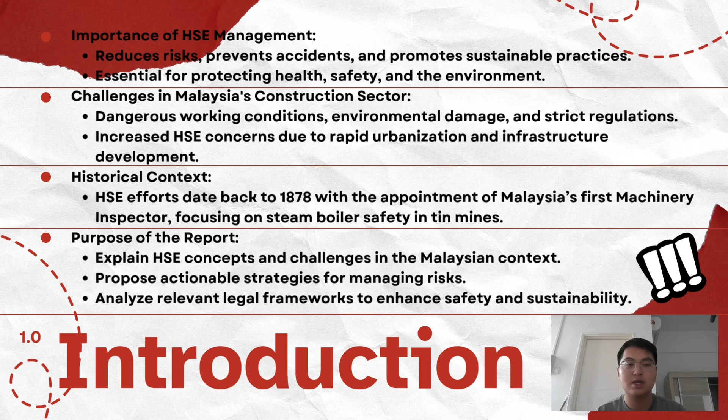This report aims to first explain HSE concepts and challenges within the Malaysian context. Second, propose actionable strategies to manage risk efficiently. Third, analyze relevant legal frameworks to improve safety and sustainability in the sector. Together, let's work toward a safer and more sustainable future for Malaysia's construction industry.

Thank you. Bismillahirrahmanirrahim. Now I'm going to talk about current HSE issues in Malaysia. There are some major issues, the first being high accident and fatality rates.

Number 2, poor construction quality and environmental impacts. Number 3, regulatory challenges and new problems arising during construction.

Now I'm going to talk about the causes. There are several causes, and number 1 is inefficient or insufficient workforce. This may lead to the limited enforcement of worker welfare, like rest facilities and sanitation, which may lead to the spread of infectious diseases like hepatitis A among the workers.

Number 2 is inadequate tools and technology, such as lack of proper equipment for tasks like working at high-rise buildings. There was a case of a fatal fall on 15th March 2024 due to poor safety equipment.

Number 3, economic constraints. Insufficient funding leads to low quality machinery. There was a case of a worker being crushed in a molding machine on 2nd March 2024.

The last cause is unsafe worker behavior that doesn't follow safety regulations, resulting in accidents. On 16th January 2024, a worker was electrocuted because of improper wiring. All these cases have been investigated under Section 15(1) of the Occupational Safety and Health Act 1994, Act 514.

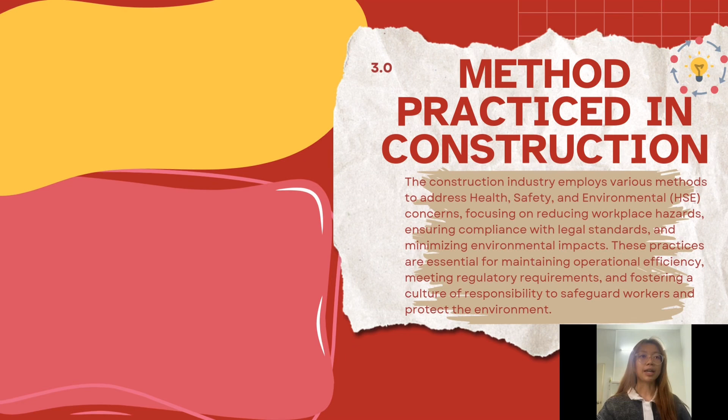Focus on safety and health management. Key methods include regular site inspection, risk assessment, and safety planning to identify and address potential hazards. Personal protective equipment is critical for worker protection. Well-designed training programs equip employees with the skills to operate safely. Emergency preparedness further ensures readiness to respond effectively to unexpected incidents.

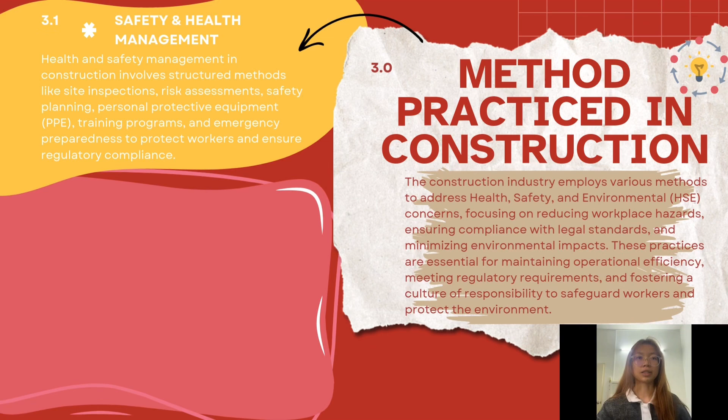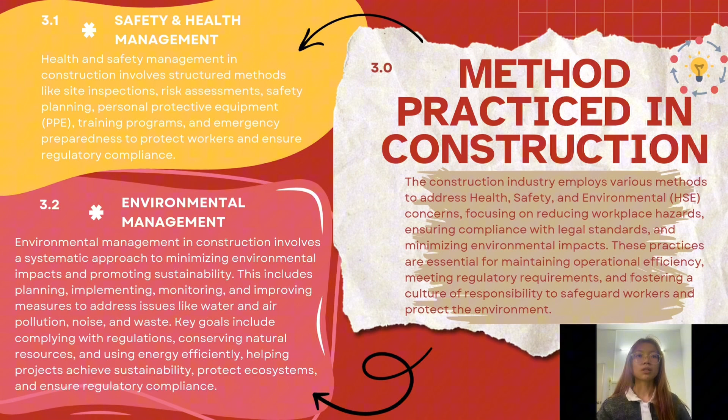On the environmental side, management efforts aim at minimizing negative impact and promoting sustainability. This involves careful planning, continuous monitoring, and implementing measures to address issues like air and water pollution, and waste. By conserving resources and improving energy efficiency, the industry not only meets regulatory requirements but also protects ecosystems and ensures sustainability. Now, let's move to the next page.

Now I'll be sharing some key methods used in safety and health management in the construction industry. First, let's talk about site inspection. These are proactive measures where the construction site is thoroughly examined to identify hazards and assess risk. During inspection, unsafe conditions or faulty equipment are identified and issues are prioritized based on severity. This ensures compliance with safety regulations and allows immediate corrective action. Findings are documented for future reference, and involving employees in the process helps raise their awareness of safety risks.

Next, we have the use of personal protective equipment, or PPE. PPE includes items like helmets, gloves, goggles, and safety shoes, which protect workers from specific hazards such as falling objects, chemical exposure, or sharp tools.

Employers must ensure that necessary PPE is provided and that its use aligns with safety regulations, such as those set by OSHA. This approach plays a vital role in minimizing injuries and promoting overall worker safety.

Another important method is training programs. These structured sessions equip workers with the skills and knowledge to perform tasks safely. Workers are trained regularly on how to use equipment, handle materials, and respond to emergencies. This raises awareness of job-specific risks, reinforces compliance with safety regulations, and ensures workers understand their legal rights and responsibilities. Training also enhances emergency preparedness and fosters a culture of proactive safety.

Lastly, another method is collecting, analyzing, and maintaining incident statistics. This method involves tracking all accidents, injuries, and close calls to improve safety. We track and record every accident, injury, and close call, then analyze the data to identify patterns and root causes. Based on the findings, we implement necessary changes such as updating safety protocols, improving training, or fixing equipment. This ongoing review helps us continuously improve our safety measures and stay on top of new risks.

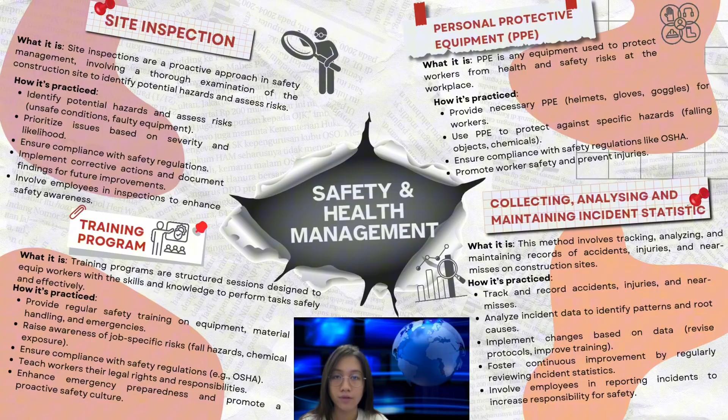Involving workers in reporting accidents encourages them to take responsibility for their own safety and the safety of their colleagues as well. In construction, environmental management is crucial for reducing the impact of building projects on the environment while promoting sustainability.

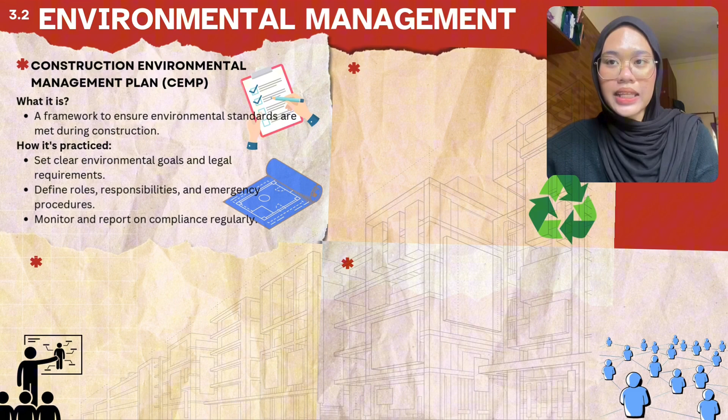First of all, the key method is the Construction Environmental Management Plan. The CEMP is a critical framework for ensuring environmental standards are met throughout a project. It sets clear goals for environmental protection, establishes legal and regulatory requirements, and outlines emergency procedures in case of environmental incidents like spills. Roles and responsibilities are defined to ensure accountability, and regular monitoring is carried out to track progress and compliance.

Next is sustainable practice. Construction projects now incorporate various sustainable practices aimed at reducing environmental harm. This includes resource conservation strategies like rainwater harvesting and recycling, which help minimize water consumption. Additionally, using energy efficient technologies such as solar panels and implementing waste management techniques like recycling and reusing materials can reduce both waste and consumption of new resources.

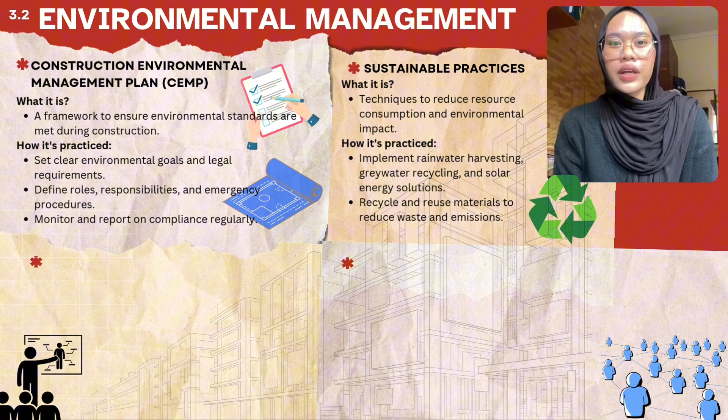The third one is training and awareness programs. Environmental management in construction is most effective when workers are well trained, so this method is used. Training programs help construction staff understand sustainable practices, emergency response procedures, and waste management techniques. This program ensures that everyone on site is equipped with the knowledge to minimize environmental impact and respond appropriately in case an environmental hazard happens.

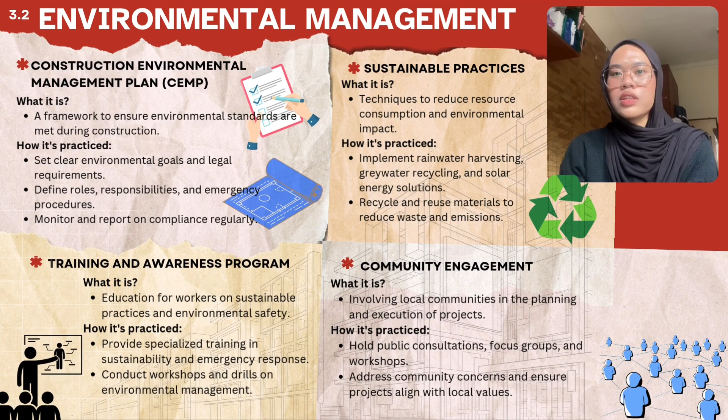The last one is community engagement. Engaging with local communities is an essential part of environmental management in construction. By involving stakeholders early in the planning process, construction companies can address any concerns or demands related to environmental impacts. Public meetings and consultations help ensure that projects align with the community's expectations and values, fostering cooperation and support for the project. In short, these methods work together to create a construction environment that not only minimizes harm to the environment but promotes cost efficiency, legal compliance, and positive community relations.

Thank you. Next, I will share strategies to overcome health, safety, and environmental issues in the Malaysian construction industry. Ensuring worker safety, environmental protection, and compliance with standards is essential for sustainable growth.

First, by strengthening regulatory compliance, authorities play a key role by conducting audits and inspections to ensure sites follow the rules. Having stricter penalties for non-compliance can push companies to prioritize HSE practices. Additionally, requiring safety and health officers on large projects can ensure oversight, while regular training programs keep workers informed about safety rules and emergency procedures.

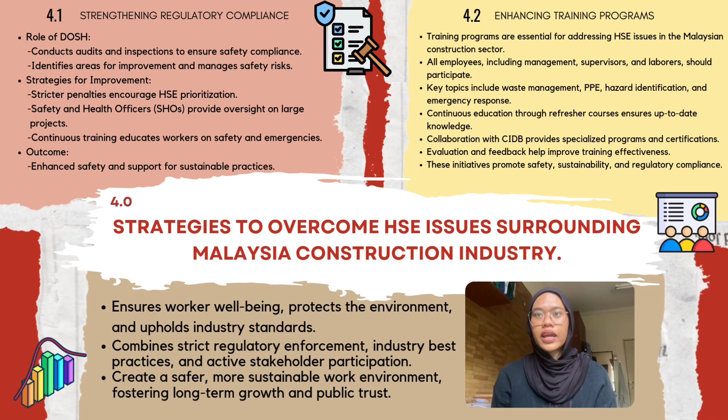This program should cover topics like personal protective equipment (PPE), hazard identification, waste management, and emergency response protocol. By collaborating with organizations like CIDB, companies can provide access to specialized training programs, practical sessions, regular refresher courses, and evaluation techniques, ensuring workers stay updated and capable of applying their knowledge on site. Certification for completed courses can also increase participation, while feedback systems can help identify areas needing improvement.

Advanced technology is transforming the Malaysian construction industry by enhancing health, safety and environmental practice. Tools like building information modeling, IoT sensors and wearable devices enable real-time hazard detection and health monitoring, reducing risk and preventing accidents. Automated machinery minimizes human error and virtual reality helps in safety training. Drones, mobile apps and robotic tools improve productivity and sustainability, while augmented reality and 3D printing streamline processes. These innovations optimize construction, enhance safety, reduce costs and support environmentally friendly practices, leading to better outcomes for all stakeholders.

Sustainable waste management in the construction industry addresses health, safety and environmental issues by reducing hazards, preventing pollution and conserving resources. Proper waste disposal minimizes tripping risk, protects workers from harmful substances and prevents environmental contamination. Recycling and reusing materials help reduce environmental impact and comply with regulations, improving a company's reputation. Effective waste management also reduces health risks like respiratory issues and skin exposure, while minimizing accidents such as slips and falls. Overall, this practice promotes worker safety, environmental responsibility and positive community relations, fostering a safer and more sustainable construction project.

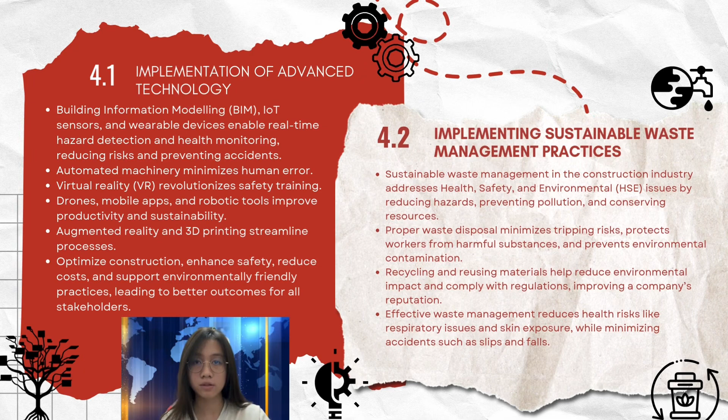I will continue with relevant acts related to health, safety and environment in Malaysia. The first act is the Occupational Safety and Health Act 1994 (OSHA 1994), which provides a framework for ensuring workplace safety, requiring employers to identify risk, implement safety measures and provide training for workers.

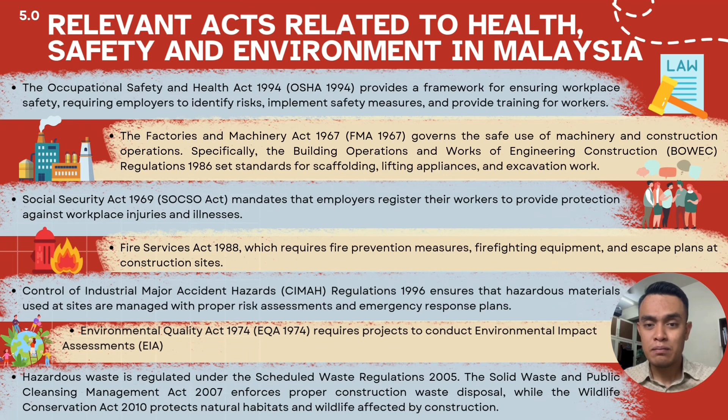Assalamualaikum. To conclude, Malaysia's construction industry faces big challenges with health, safety and the environment, even though some progress has been made with rules, training and sustainable practices. To solve these problems, we need a clear and consistent plan. This includes regular safety checks, using safety equipment properly, better training, stricter rules, and working closely with the community.

By focusing on worker safety, protecting the environment, and working together, the industry can grow and become more sustainable. Staying committed to better practice will make construction in Malaysia safer and more responsible. Thank you.